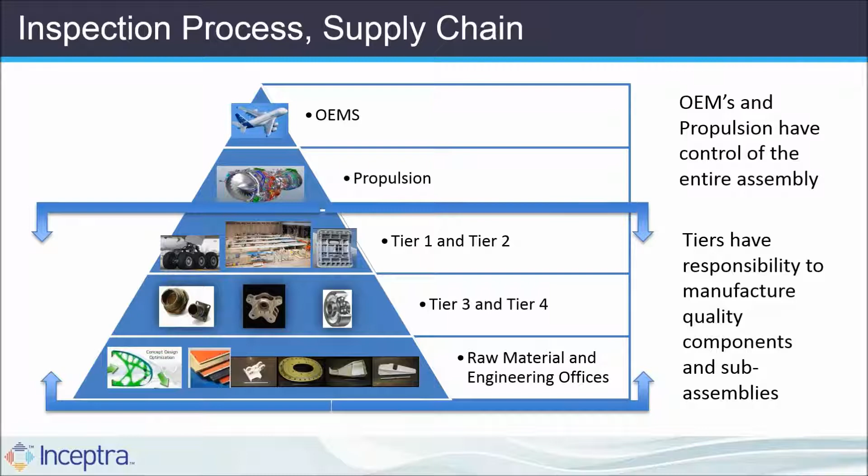And so when they have control over the entire assembly, they want their suppliers to create parts to certain specifications. The tier 1, 2, and down, all the way to the raw material supplier, have the responsibility of understanding those requirements and meeting them and producing quality parts for the OEM or for their customer. So in order to facilitate that type of communication that goes back and forth about the specifications and the demands of the part, we put in certain standards that go along in this environment.

So we have aerospace standards such as AS9102 for first article inspections, or the production part approval process for the automotive industry. So they both kind of speak the same language, and really it is that the OEMs, and propulsion is in there, communicate the requirements down to the supply chain. The supply chain consumes that information and then has the responsibility of producing quality parts. And the other interesting fact is at the run rate specified.

The reason that I add that critical component is that if we had all the time in the world, we could absolutely make a quality part every single time. It's making it at the production rate that's also specified. So there's a time component that's associated to that.

So how is this information recorded? A lot of times we have inspection plans. So if you're making a lot of 1,000 components, maybe you have to pull off every 5th one or 10th one or 20th one and go through a sub-inspection process on that particular run. Or in proving that you can meet the quality demands that have been specified, often you have to do a first article inspection report. Also, we have to have the process documented.

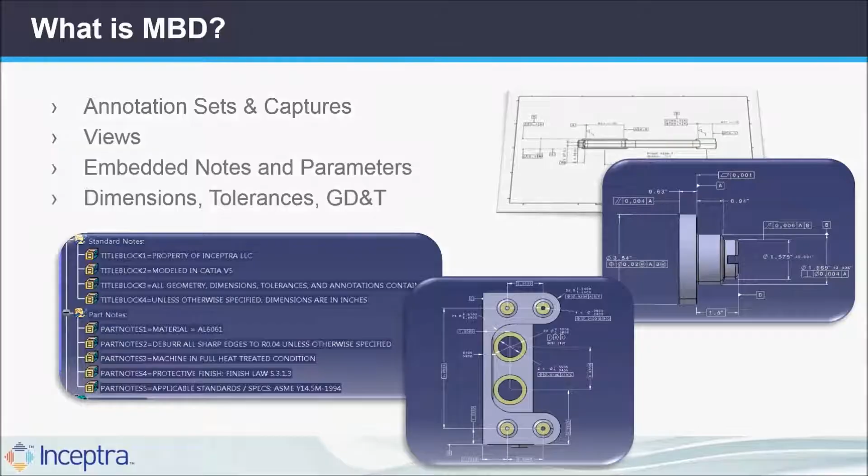So dimensions, geometric tolerancing, the datums that we have, and then also process specifications are also included either in an actual note on the 3D or in the specification tree itself. So that presents some benefits and challenges of the model-based definition approach, and that is, one model will contain all the information that you need for design, manufacturing, and inspection.

It eliminates the need for 2D documentation, and it incorporates a wider span of people, not just designers and engineers. The challenge with that approach is that, of course, we still need some 2D documentation. So there's MOT sheets or manufacturing documents that specify how we need to make the part, as well as first article inspection reports that are basically 2D based.

So to go from that 3D to that 2D, it's a manual process, and it's not really creating new information, it's just filtering from 3D down to 2D, and therefore it's not very much of a value add for most of our customers. They would like to have that information automatically extracted from the 3D. Further, this is time consuming and prone to human error. So if you're doing this day after day, you're ballooning, you're extracting information from the 3D, copy and paste and put it into a report, or if you have to type something in, a lot of times that's prone to mistakes.

So further to challenge this process of model-based definition, from the OEM perspective, it's very hard for them to be 100% compliant with the standards that are there. So just like in 2D, when you create a drawing and you don't have witness lines go over the drawing, or you don't dimension a particular feature in multiple views, we have the same type of standards that exist inside of 3D. And it's very hard for them to often have strict adherence to those standards.

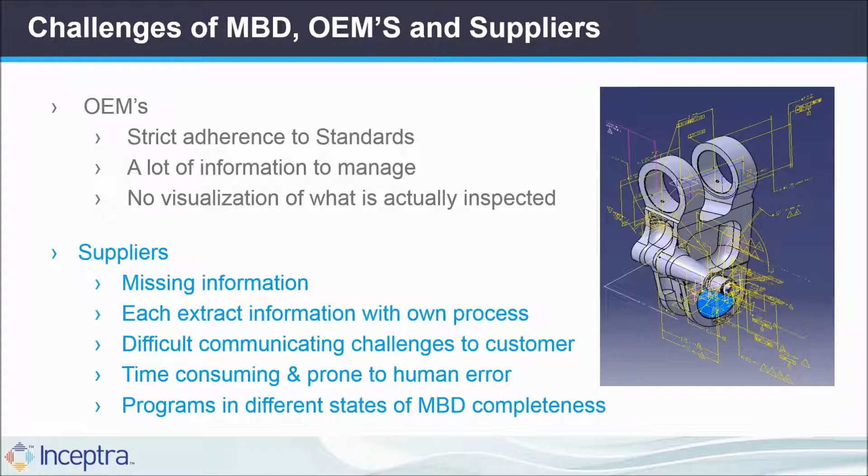And the reality is, the final comment there is that programs are in different states of MBD completeness. So sometimes you'll get just the model and the notes, the specifications are in a PDF file. They're separate from the 3D. We've run into circumstances like that. So not every program is completely embedded in the 3D model. So we've got some challenges that exist there.

Okay, so this digital continuity inspection really refers to the fact that when we start with the CATIA model with this model-based definition information in it, we can run it through our process, extract out that information, and accelerate this overall process. So there's different aspects and components to this that we'll get into deeper as we go through the presentation, but the red area here is something that's called Q-Checker, and what that does is it allows us to run predefined checks on the model to make sure that it's actually adhering to standards.

Some things we can actually fix, and some things we can just get warnings or indications where there may be potential issues with the model. So that's an optional phase, but it does scrub the data and let us know where we may have some of our challenge points before we get to the next phase, which is the Inceptra tool.

So this is the model-based definition accelerator. It creates a first article inspection report by extracting the information from the CATIA model and producing several deliverables. So one of those deliverables, now into the purple section, is the AS9102 in an Excel format. The other thing that we produce simultaneously is an XML file, and then we also create a ballooned CATIA model. So these are our downstream deliverables.

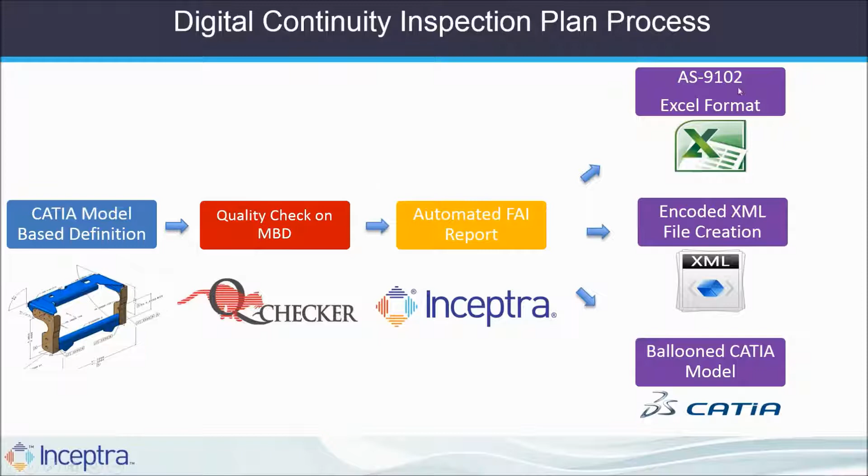But now we can actually populate that to some downstream applications such as NetInspect. So we can populate the AS9102 at the same time to NetInspect, and then we can also use this XML file and the ballooned CATIA model to feed in our measurement system, and our current partner is Verisurf.

So what this means is that a dimension that came from the CATIA model will have a characteristic ID that will be identical in the AS9102 Excel format, it will be identical in NetInspect, and it will be identical inside of Verisurf. And that is exactly what we mean by the digital continuity as we go through this process. We're always using the same processes or the same reference as we go through this.

All right, so let me continue on, and we'll elaborate on a couple of these applications that we've been using. So we talked about Q-Checker. There's about 350 different out-of-the-box checks that you can use with Q-Checker. About 30 of them pertain to specifics with functional tolerancing and annotation.

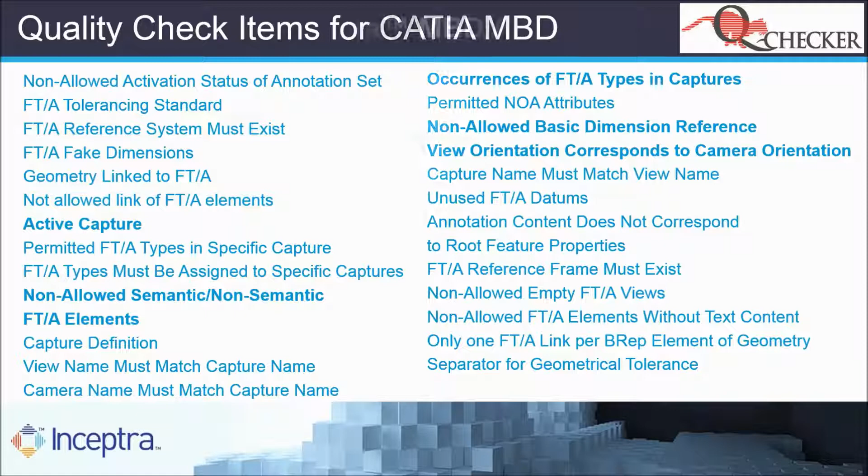The next step is to actually run the data through the Inceptra model-based definition accelerator. And this is our application that you can run on both parts and assemblies. It's configurable for different annotation methods.

So if you have multiple customers that you're working for, perhaps you're working for Bombardier or perhaps you're working for Boeing, depending on where you're at in the supply chain, they may use different approaches. And so we have a configuration file that we can utilize behind the scenes to specifically extract out their type of formatting that they've done for their models. We also can configure the reports.

We extract both captures and notes. The notes are stored in any location within the model, so it can be on an actual capture or it can be from the specification tree. We do automatic ballooning for the first article inspection, and we create that first article inspection report. And the very last line here, the XML file can be created and consumed or used to publish into NetInspect, Verisurf, as well as DELMIA.

So what this provides is a key extraction and population. So it's a consistent approach across all of our customer base to extract out this information and then populate it into the first article inspection report. There's no need for multiple attempts from each supplier, and we actually do error trapping behind the scenes. So if a dimension is actually shown in multiple captures, we're only going to balloon it once.

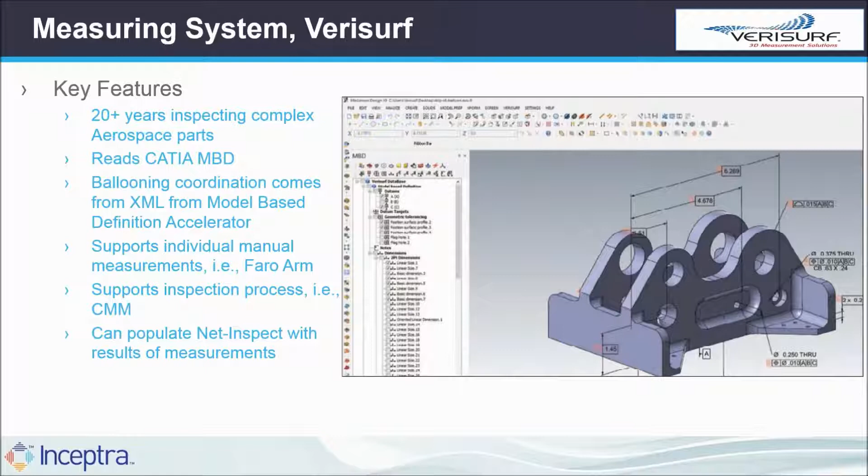So getting to the point of the webinar today, that was just background information. We do have MBDA 4.0. This is our enhancement list. In the first article inspection report, we've actually touched Form 1, 2, and 3. On Form 1, there was a request for doing partials. In the past, we've run through the entire model, and it was an automated or accelerated process to extract everything out. We've enabled a partial mode. So if a dimension has changed, if a tolerance has changed, and you only need a partial, you now have the ability to do so.

In Form 2, there's been a request to extract out part notes and parse them against known keywords. Oftentimes we'll see "per ASME standards," for example. That would be an indication for us that it should actually be parsed and put on Form 2. And on Form 3, we've added conditional formatting.

The other two highlights here are that when we publish to NetInspect, we're also uploading attached files. What that means is we are producing the 3D XML of the balloon model, as well as a JPEG of each one of the views. We'll show that off. And then for Verisurf, we have the ability to create this XML file along with the balloon model, send that off to Verisurf, they do the inspection, and then we get the results back. We can color code the results and actually publish those results to NetInspect.

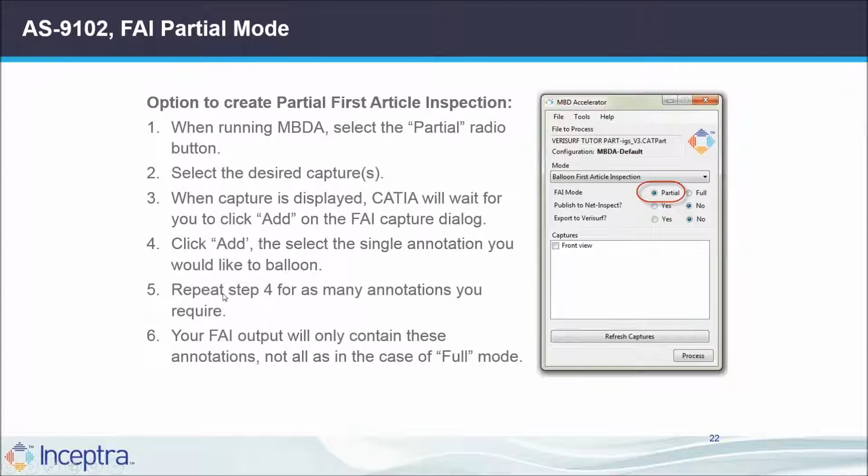So that was an overview. Here's a little bit more detail on each one of those areas. There is the partial FAI mode that's available in Model-Based Definition Accelerator now. On Form 2, we have the option to specify the specifications that we'd like to parse and put on our first article inspection report. The report that we create on Form 3 actually has conditional formatting, so it will let you know when you're within tolerance, when you're marginal, and when you're out of tolerance on the measurements that we've provided.

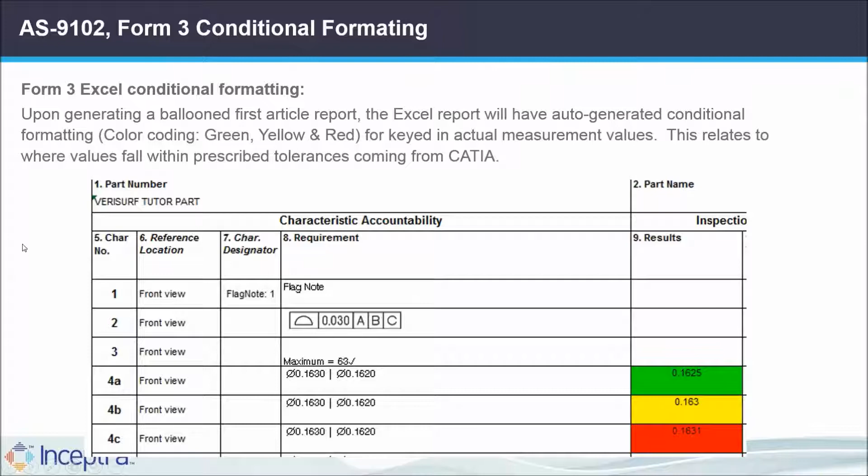For NetInspect, the automatic publication now shows up on Form 1, where we can show the different JPEGs of the views that correspond to Form 3, and we also put the 3D XML up to NetInspect. You can view this in a free 3D XML player on any desktop. It's a free player that allows you to download this 3D XML, and all of the views that we've ballooned actually come over. We'll demonstrate that as well.

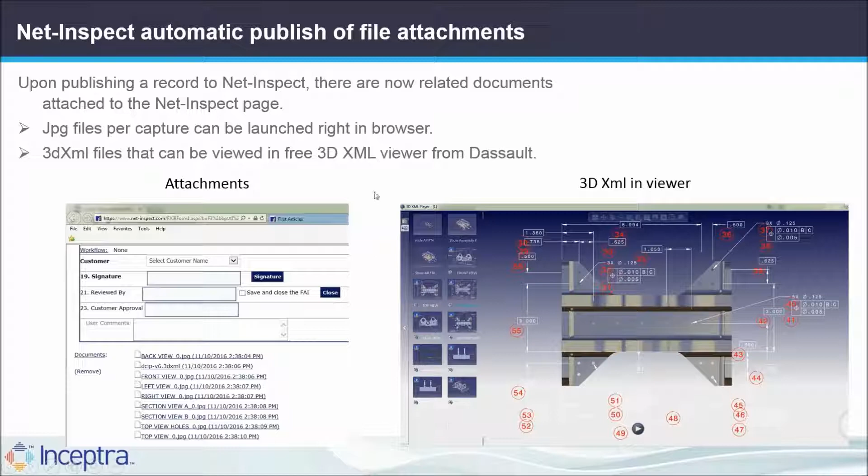And finally, before we get to the actual demonstration, the Verisurf import of their results will verify that it matches the input that we've exported out to Verisurf, so that no one has tampered with any of the data or loosened up any tolerances or anything like that. We do a checksum on the data, and then we can color code the dimensions to let you know which ones are out of spec and which ones are in.

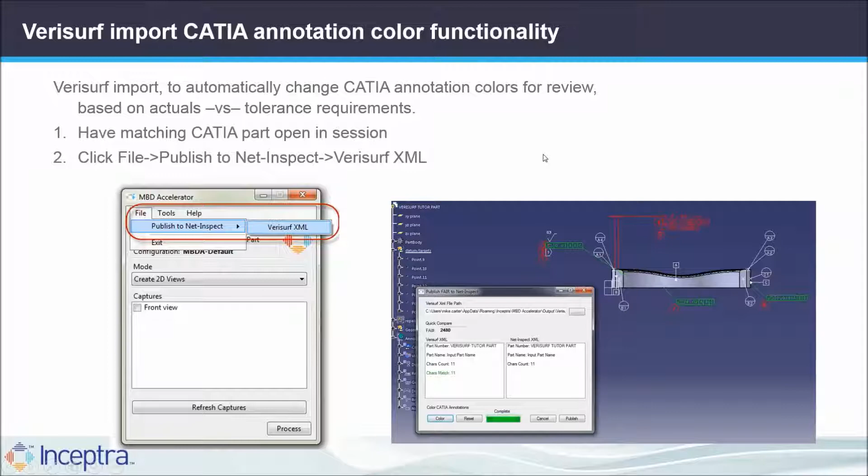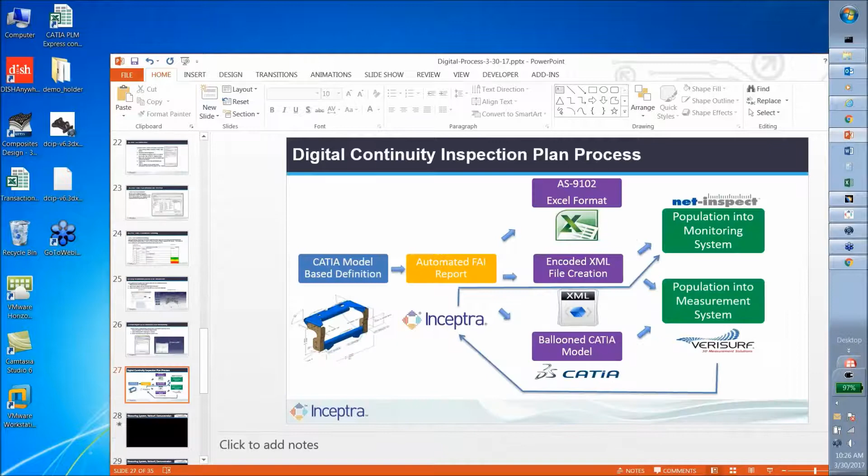All right, so with that, let me get into the demonstration and give a brief overview of some of the things that we've been talking about. So as we take a look at the part, I'm now in CATIA. We've received a part that we need to manufacture. One of the items that we talked about is the adherence to standards. We're checking the model before we ever start on this process. Garbage in equals garbage out, so let's take a look at the model and run it through Q-Checker.

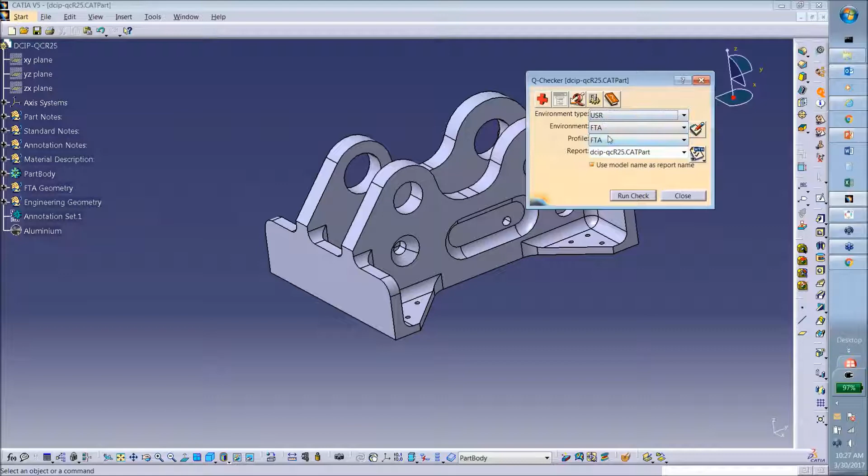Q-Checker is a commercial application that's available. They have different profiles. We've configured one that specifically checks functional tolerancing and annotation items. And what that means is as I run that check, it starts to give me feedback upon all of the checks that we've enabled and whether they've passed, whether they're marginal, or whether they're a critical item. So one of the things that you'll often see is that first off, we have an annotation set on the model and it's not even turned on.

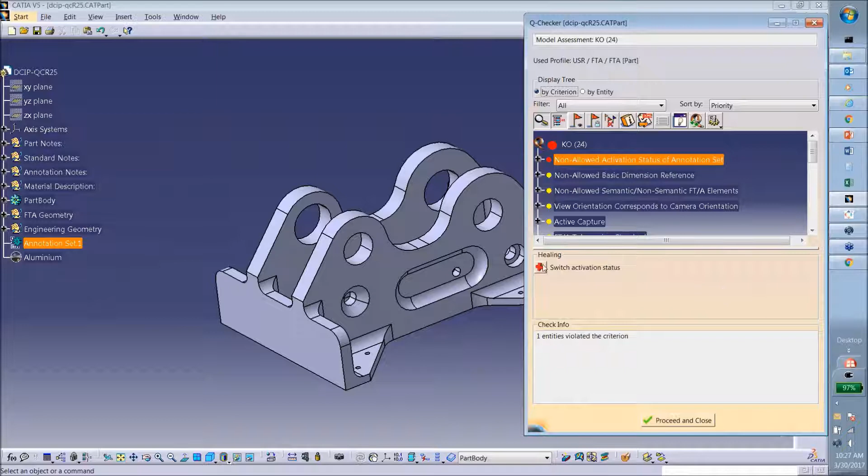So if you're using a third-party viewer, where this is critical is the fact that the third-party viewer doesn't know how to turn on the annotation set and will not even realize that there's any annotation on the model whatsoever. Our application actually automatically turns this on, but it's just a good demonstration of capability. So in some cases, we have the ability to heal that. So as soon as I select on it, now we've actually corrected that critical problem. We've actually turned on the annotation set through QChecker.

We've got some other items that now we realize in the capture environment that the capture is actually active. And what that means is that if we go through a ballooning process, any new balloons that we add and there's an active capture, every time we go to display that capture, it's going to display those balloons. So what you might want to do is actually deactivate that capture, and we've solved that particular item.

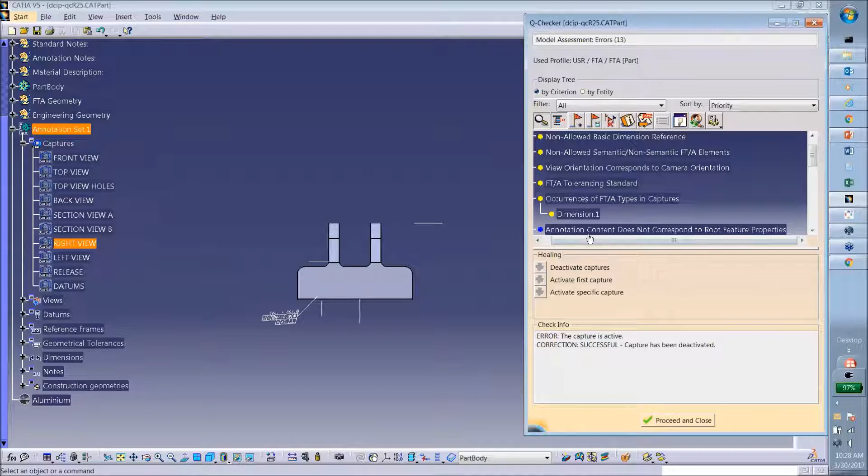A couple other items, occurrences of FTA types in captures. And what that means is that a particular dimension is actually being shown in multiple captures. So it's in the top view, section view A, datums, and section view B. So this is against the standards. So if I take a look at the captures, you can see that it's actually in 4 of approximately 9 or 10 of these captures.

We're supposed to display the dimension only in one capture, and that's kind of like on a 2D document, you display the dimension only in one view. So on this, you'll notice that there is no healing. We don't know which one you would like to show this for, so you're going to have to manually go through and determine which one that is, but it does give us a little bit of a warning on that.

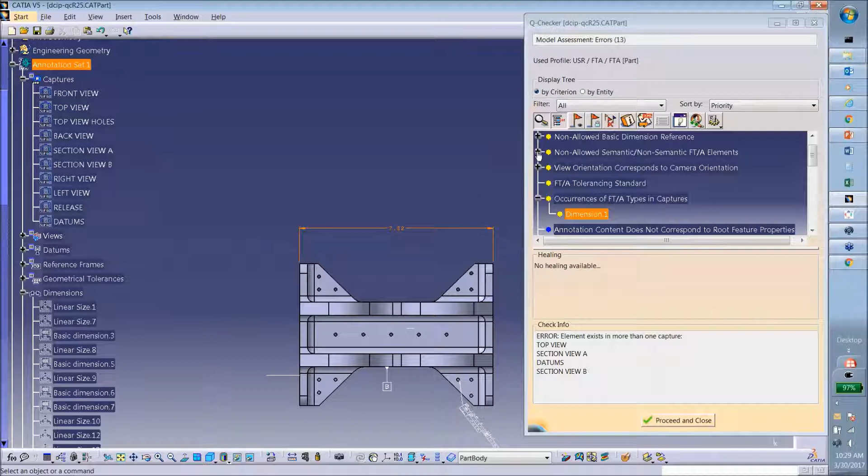The last one to talk about is semantic and non-semantic tolerancing. It's realized that one of these tolerances is non-semantic, and really what that means is that there potentially is no issue with it, but there is no guarantee that this is adhering to standards. So it's just some note that somebody created on the model, and that means that it's non-semantic.

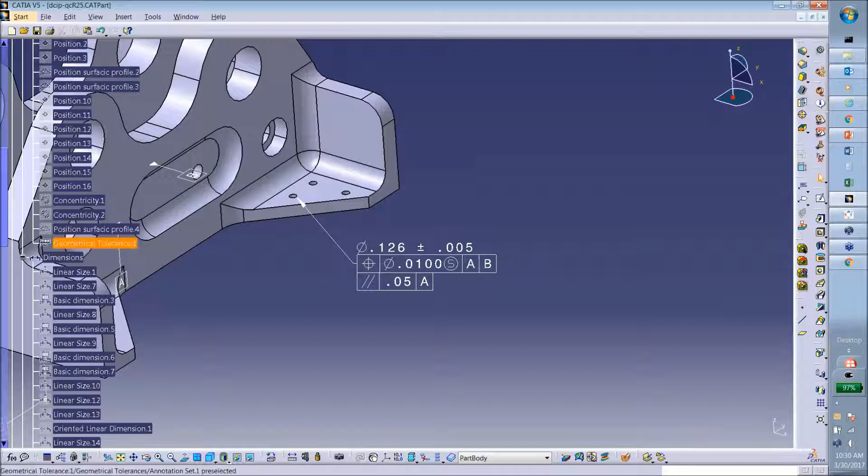And what that specifically can mean is that we've got a perpendicularity condition that's on here, and I can simply just go, what's opposite of perpendicularity? Parallel, and I could set that to it, and no bells, no whistles, no warnings went off, and that's because this is non-semantic. If this was a semantic tolerance, obviously we would know that this hole is actually perpendicular to datum reference A, and that is the criteria that it would only allow us to put on there.

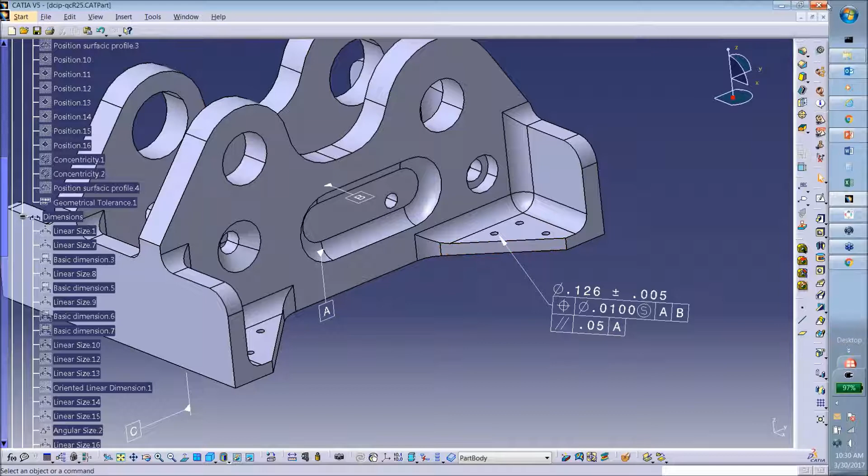So just again, some warnings that if you run into non-semantic tolerancing, it may not actually be formatted correctly, or it may actually be gibberish that got put on the model by mistake. Okay, so let's start going through a model and processing it.

Now we've scrubbed it, we've got our issues fixed up, we've put the dimensions on the right captures, we've got a clean model, and we're going to process that now. So with Model-Based Definition Accelerator, what you'll notice is that this is 4.0, so let me start in that area, that this is version 4.

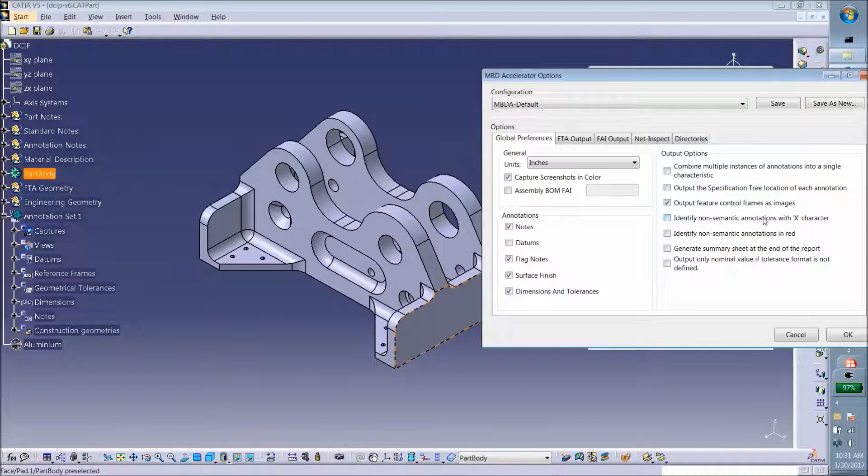And we've got a couple options that run in the background. So you can configure these different options to match the supplier that you're receiving data from. It highlights what we're going to annotate. When we run into non-semantics, do we actually want to put an X on there? Do we want to balloon datums, etc.? Are we working in inches or millimeters? And then it's really just kind of dictating what the pick and place process looks like.

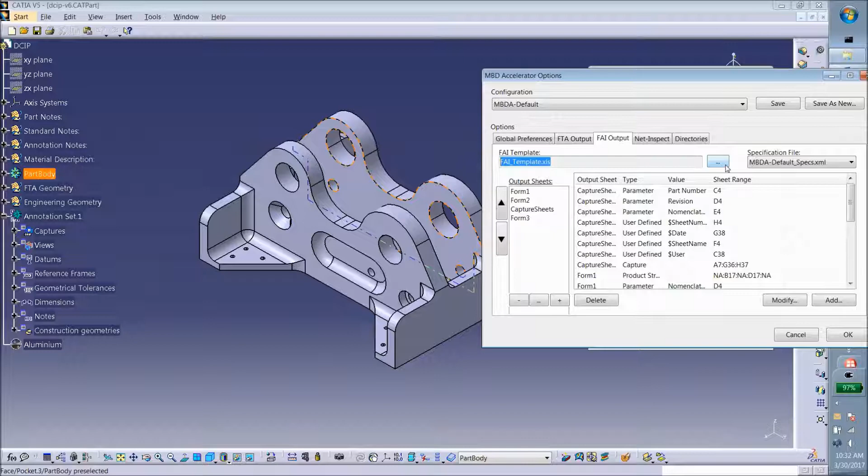So on capture sheet number 1, in cell number C4, that we're going to populate into this template that we provide, we're going to put the value of the part number from this model into C4. So it starts to dictate what we're extracting and where we're actually putting it. What you will notice is that in 4.0 we now have a specification file that's here, and this specification file contains the keywords that may exist in the model that we want to put on form 2.

Further on here, because we are going to NetInspect in the end, we have the criteria for our user login that we're going to use for NetInspect also recorded. So we've configured the options that we'd like Model-Based Definition Accelerator to use. The configuration file is denoted here. The model that we're going to run it on is the same model that's active in the CATIA session. We've got a couple different modes that we can actually enable.

So we can simply just create 2D views. Sometimes people just want to extract out the information from the model and create an Excel file, maybe for quoting. You can certainly do that 2D view. Or we can go one step further where we create the 2D information into the template that we've specified and balloon it. So I'll also tick mark that I want to publish this to NetInspect, and I'd also like to create the XML file for Verisurf.

The captures that are now next in the list are actually the captures that correspond directly to the model. So we have those listed. I can right-click and select all. I can deselect individual ones. So release is just a blank view. You can include it or not include it. It would be fine. If there's nothing to balloon, I tend to leave that off. And then we'll start the process of the actual ballooning.

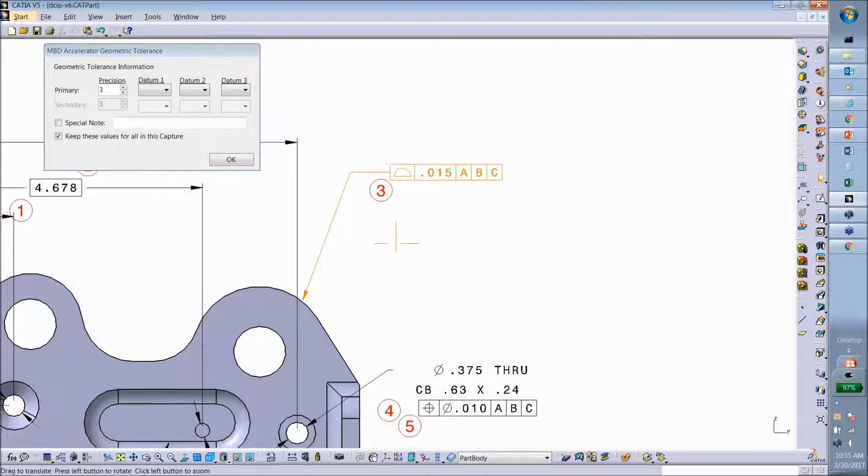When I go to next capture, it's also going to verify, because people use various different environment variables and various different configuration files, the level of detail that we have in here may actually change, so to what precision is actually displayed. So I can set the precision inside of here, and then if I look around the model, I can see that they're all to the third decimal place. So I'm going to say, don't go and ask me about each one. We're going to keep it all the same for this particular capture. So we continue through this cycle.

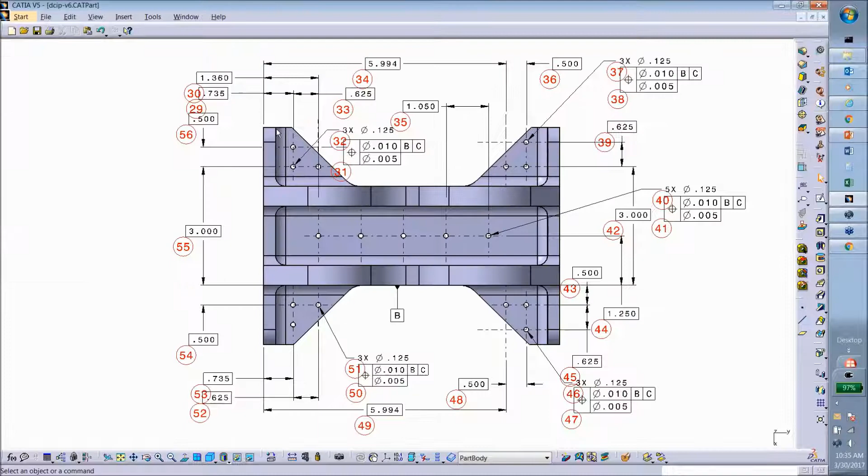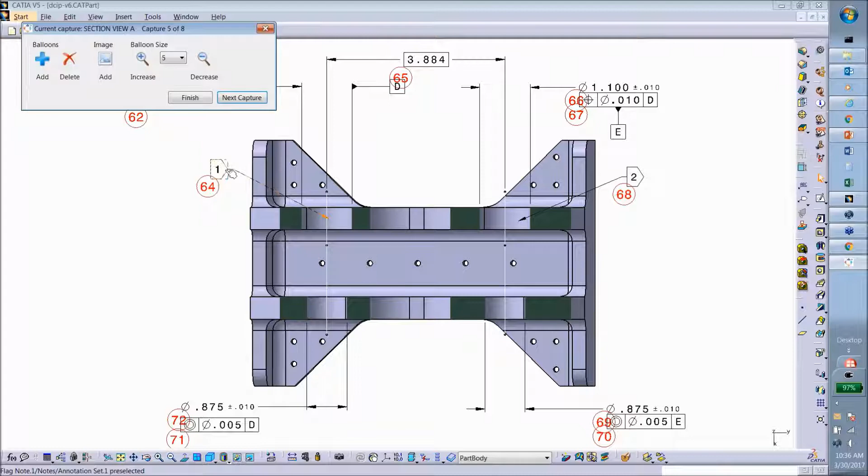And what I usually ask our customers is, think about going through 80 or so of these dimensions and recording all of them so that they look appropriate and putting them into a report. How long would that take as a comparison? The other thing to point out is that 64 and 68 are actually referring to flag notes. So we'll show you how that is treated inside of the report. A couple more captures in here.

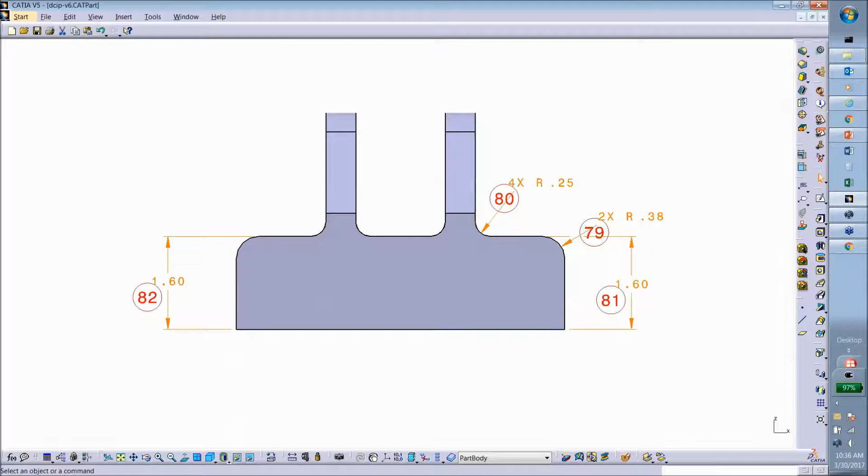I believe this is the last one. So we did about 82 balloons. We captured 82 unique items. Watch my Excel icon over here on the right-hand side. So we're going through the process right now of actually gathering all that information, creating the Excel report, and at the same time, we are connecting live to the NetInspect site and publishing that information.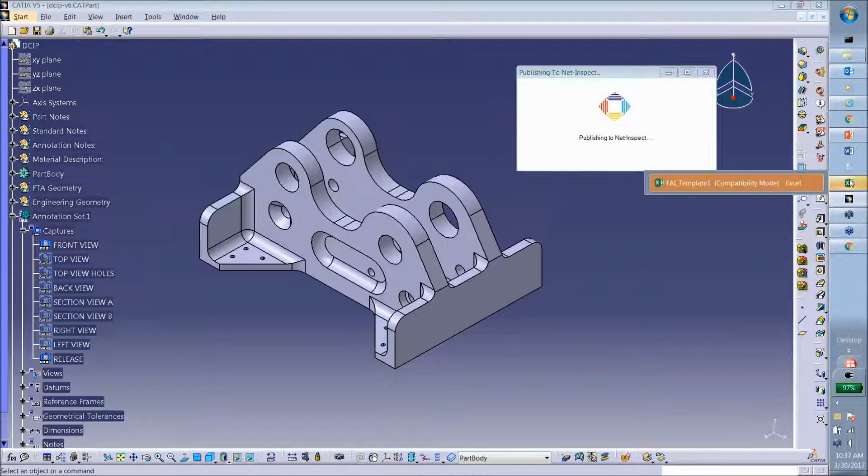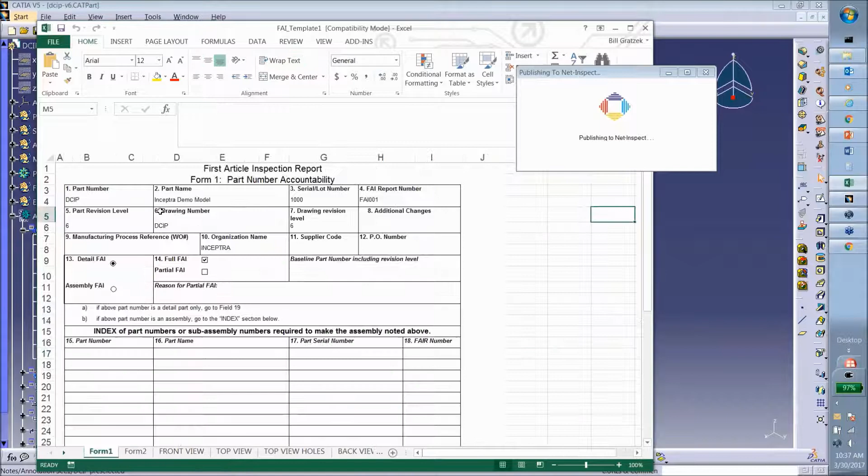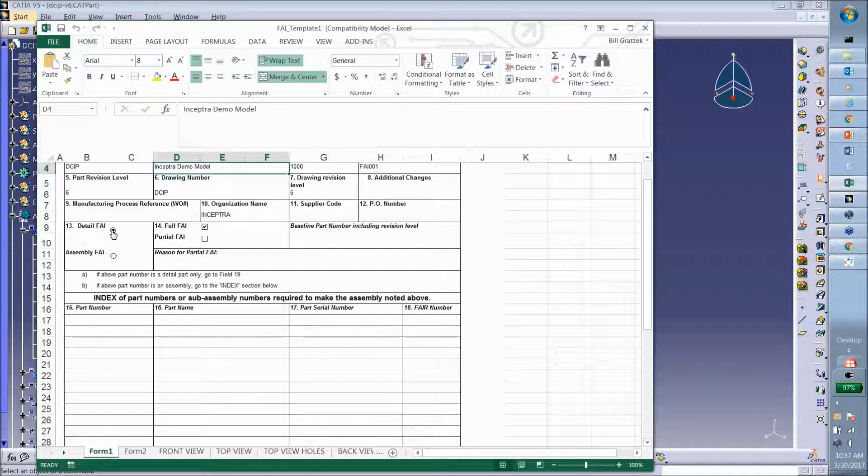So all that information that we've configured has been put into this report. If we had an assembly, this would be ticked off as assembly first article inspection, and we would fill out columns 15 through 18 with the bill of material information of all the components that are in the actual assembly.

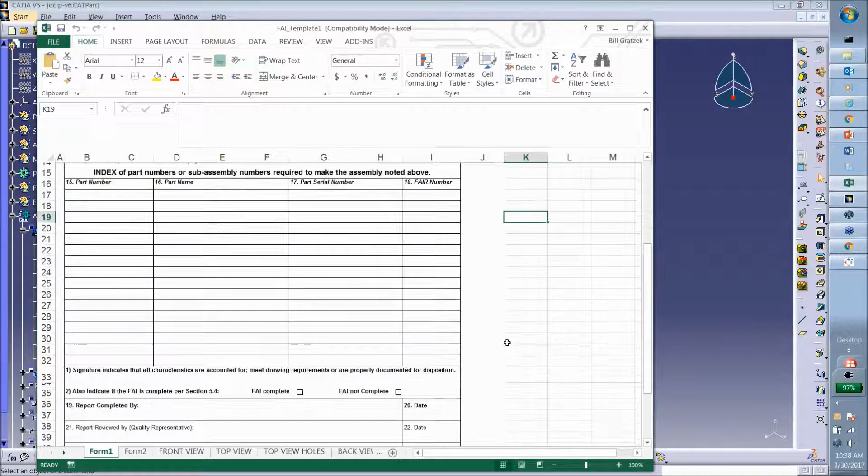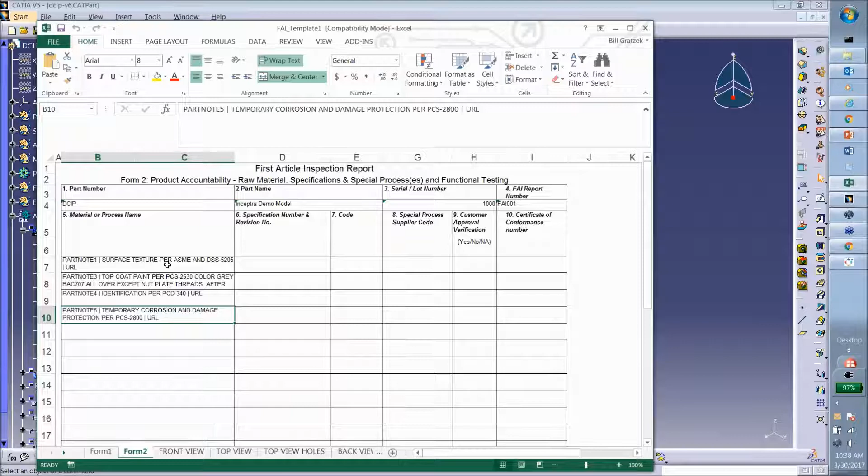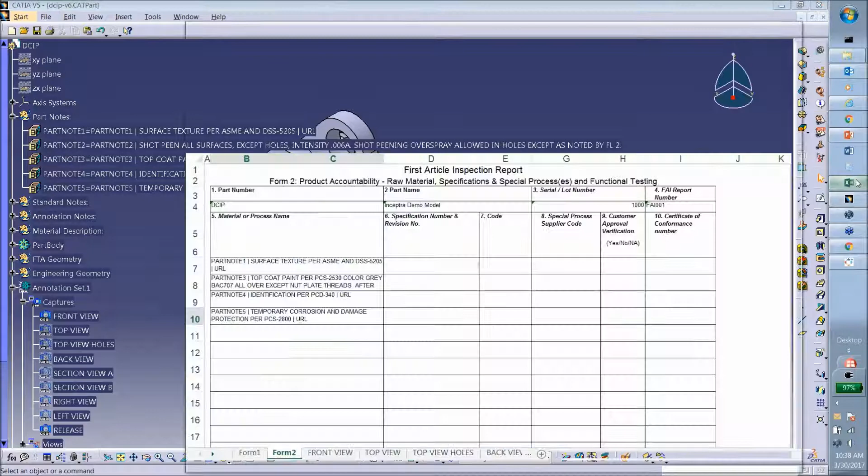So if I go to Form 2, now you'll notice that there is a change. What we've done is we've identified any note that should be populated in Form 2 based off of our specification file. So specifically what that means is that if I take a look at part notes here, there were 5 part notes, but only 4 of the 5 actually called out a specific specification. So per ASME, per PCS, per PCD, per PCS.

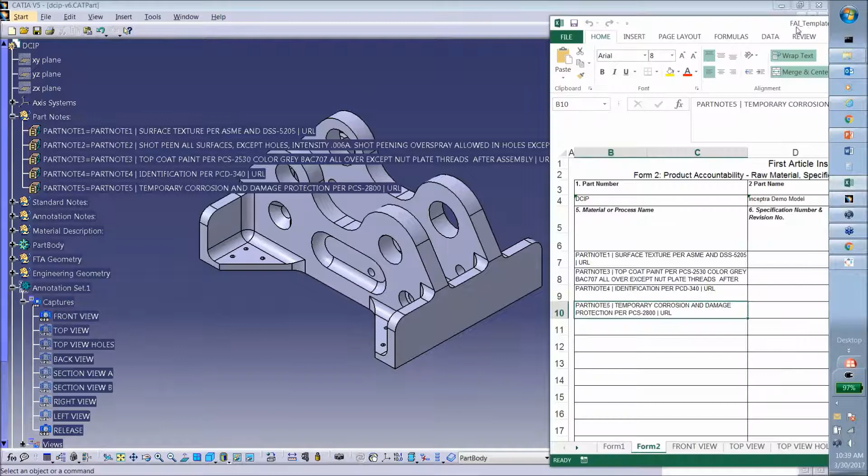So these are the ones, 1, 3, 4, and 5, that actually have been recognized by our specification file, and they get populated. Part note number 2 does not have any of that terminology, but it does talk about the flag note 2 that's on here, but it doesn't belong on Form 2. So you can choose to employ this or not.

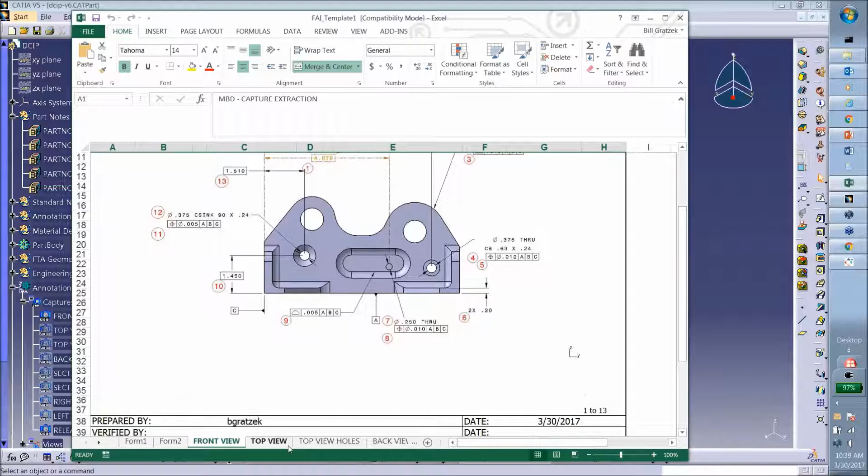And then as we go further through the first article inspection report, we start getting to the Form 3 supporting items. So here's the ballooning capabilities. You'll notice that it denotes that this particular view contains 1 through 13, 14 through 28. And as we move through the particular views, we get all of them all the way up until the Form 3 formatting. So this dictates which reference location it came from, and I will continue on with going through these.

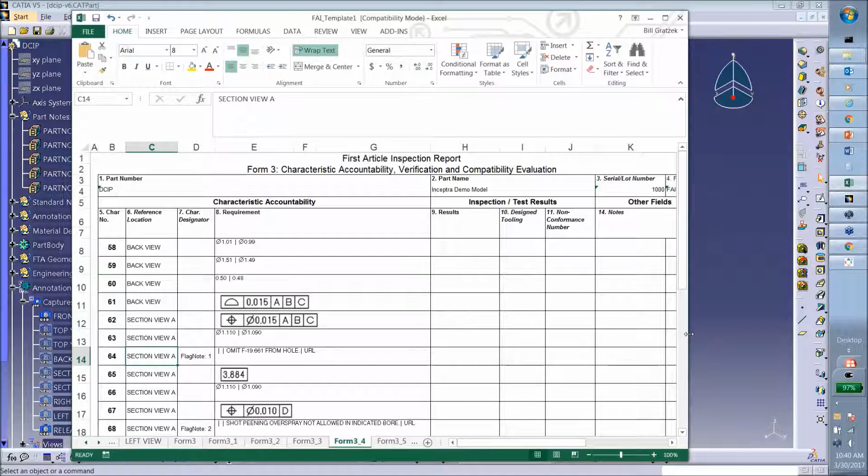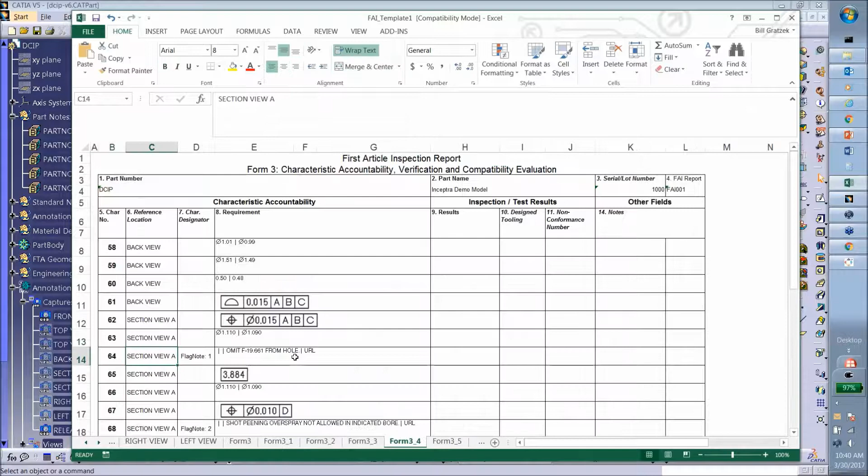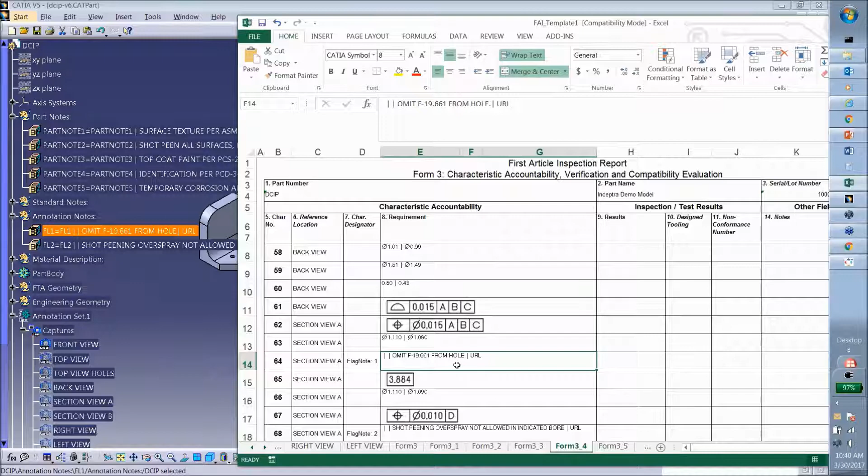So all of that's been captured, and the one thing that I wanted to point out is that on section view AA, if I bring this back just a little bit, section view AA, that was the one with the flag note. And we take a look at, well, where did it actually get this value from, because it only populated just a balloon on that flag note. Well, that actually synchronized up to flag note number 1, and then we extracted this information and then correlated that to the flag note number 1 value that should be populated in our first article inspection report. So that's in on the inspection.

Let's go take a look, because it did populate up to NetInspect. So I'm going to go to the actual live NetInspect site. If you're required to populate information up here, you would first log in. So everything that you do on the NetInspect site is required by username and login, so they know exactly who is in on the data. Let me see if I got that correctly. And then you'll have access to that. So if you ever populate anything in here, if you ever change anything, all of that information is tracked.

So if I take a look at my first article inspection reports that are up here, we'll see that the last one, the 2537, is the last one that I just populated on this date. And that was the one that got indicated through our notification through the model-based definition accelerator. So this is identical to the first article inspection report that we have just taken a look at inside of Excel. You'll find all the characteristics match, all of the population of the information matches, as well as, and this is new for version 4, we've actually populated the views that go along with this.

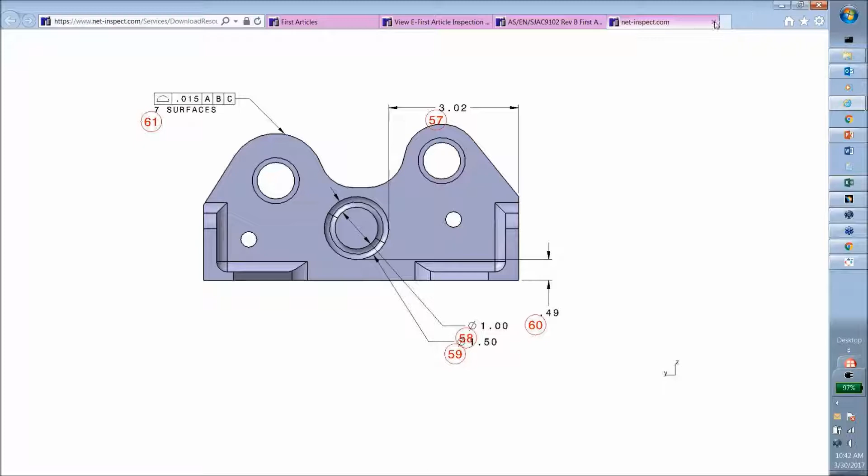So if I wanted to do the front view and see the actual balloons as I'm taking a look at this report, I certainly can reference that. The other item that we have is that we've populated the 3D XML up here.

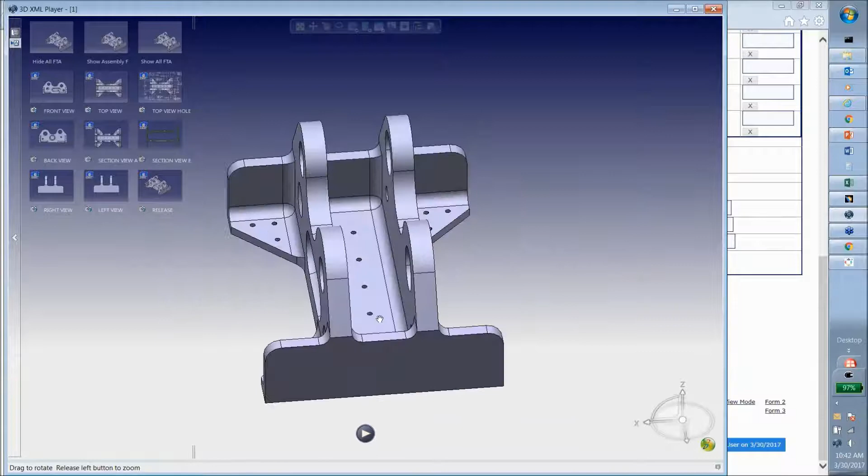So I have the ability to save that off, and when I save it off, then I can actually use a free 3D XML player from Dassault to review this information. So what's in that information? Well, it's everything that we've populated so far. So if I go to the front view, you'll notice that all the balloons along with all the dimensions are there. Top view.

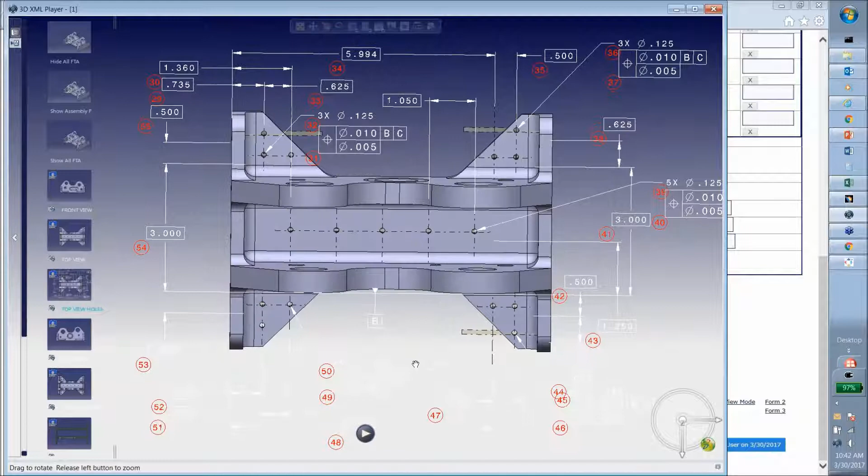So now you can look at this report, and you can also reference the 3D information at the same time. So if you're looking for a specific dimension, I think it was in the top view, you may remember that we had, well, which dimension is it for the 150? Well, the 24 is calling out this 150, the 25 is calling out the 150 that's in the middle. So there will never be any confusion for that further. Plus, you have the views to look at.

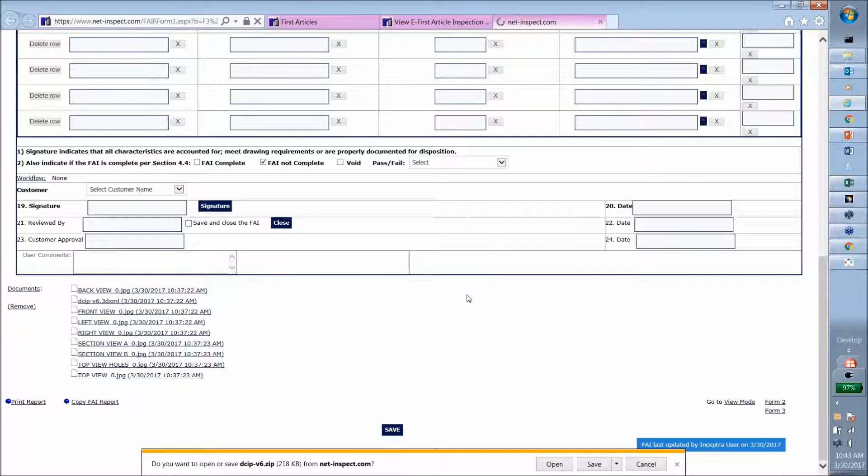Form 2 here also contains our specifications, and what NetInspect does is it actually calls out which standard, whether it's ASME or PCS, and populates column 6. So they have their own internal linkage to what we've actually populated through here, and they maintain that. And then let me go to Form 3.

And when we pull up Form 3, what you'll see is these are the exact dimensions that were called out onto Form 3. Now the interesting thing about what we've done when we populated to NetInspect is the fact that this information has had business logic formatted into it. So we've dissected this, we've created all the symbols, so whether it's a profile symbol or the actual tolerances that go along with that, and then we put the business logic down below.

So when you type in your actual results, so let's say we did 3/8 on that, that's within tolerance. If we get marginal right on the boundary of the tolerance, it shows up as yellow. And if we go below the tolerance, it actually flags it as red. So this is the business logic that we've provided when we populated to NetInspect, and then they display these results in this way.

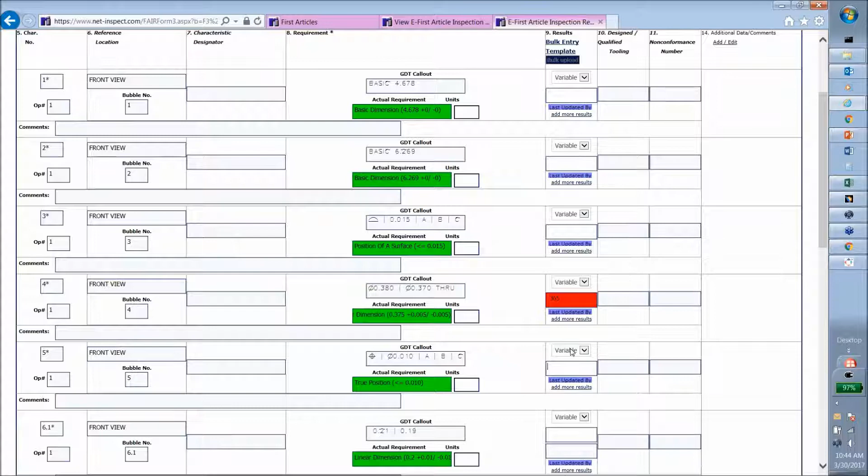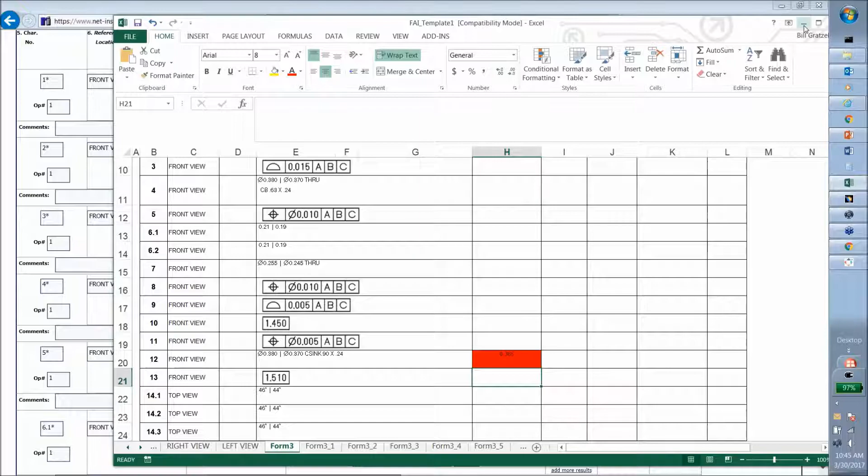So similarly, what we've done, which is also an enhancement on our particular results, if I go to that in our Form 3 on our Excel page, and maybe you're not using NetInspect, if I put in the value for those results, we actually get the same color coding that is supported by NetInspect. So if I'm marginal, it's going to show up as marginal, and if I'm out of range or out of tolerance, then it shows up as red. So we've got those color codings that go along with this.

The last part that we're going to talk about is the Verisurf integration to this. So let me do a quick video presentation. So as we've created the first article inspection report, we've populated that to NetInspect. It's waiting with the first article inspection report up there. These two have direct continuity between them, as well as the information that we've sent over to Verisurf.

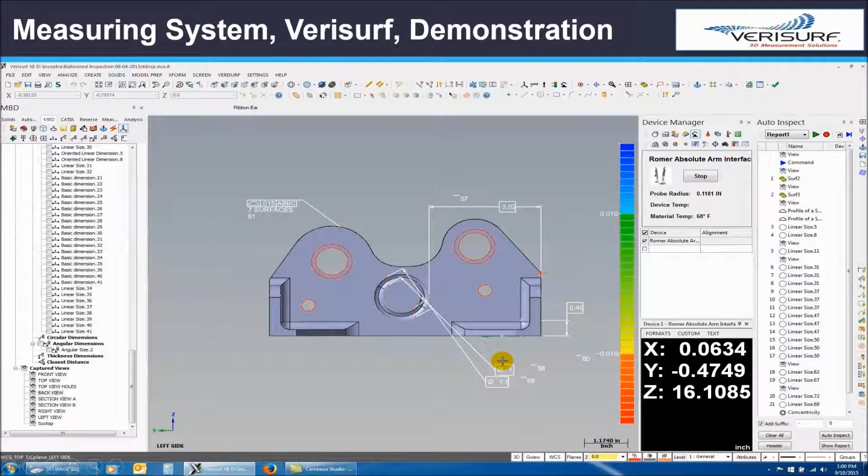So as I take a look at the Verisurf item, this is now that part inside of Verisurf. It has the dimension along with the callouts identified. So it brings in the geometry and also verifies the geometry, as well as captures all the dimensions, all of the balloon characteristics that we've put in for each of these dimensions. And what we can do from there is actually come up with the inspection plan.

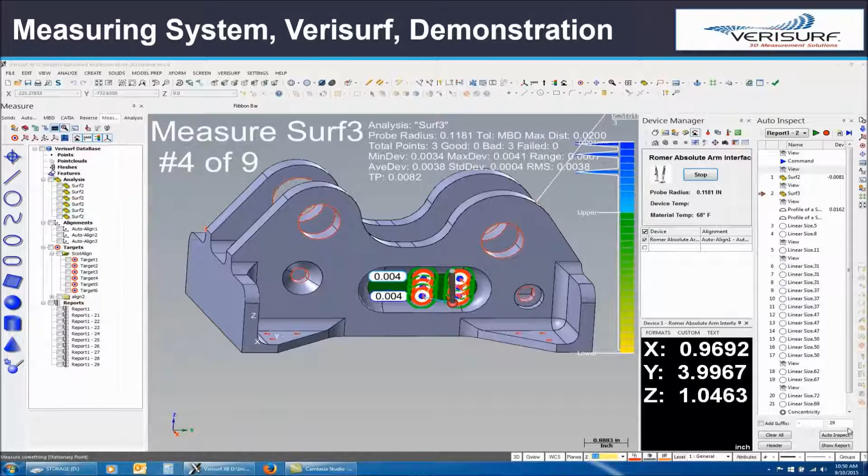So for example, there is a specific profile callout on this part, which requires us to take about 28 measurements to let us know if we've actually satisfied that profile tolerance. We've also got a surface measurement for parallelism that we need to do 9 measurements on. So it's not a correspondence of one measurement per each characteristic. There may be a number of measurements that are required in order to satisfy whether or not we're in or out of tolerance on that particular condition.

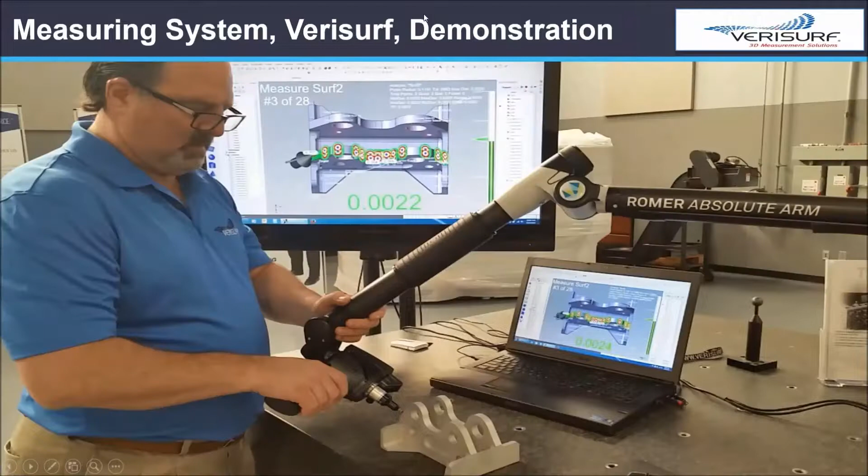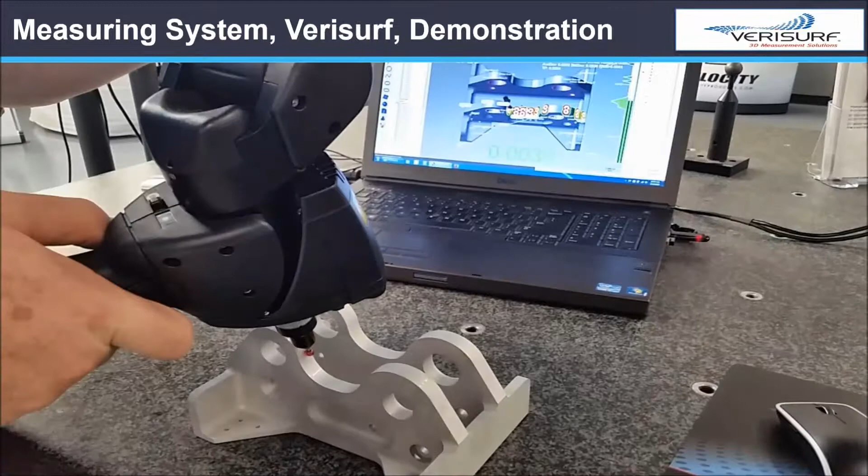And what that actually looks like is you can kind of see that the targets are displayed. You saw that prior. Now we can take the Romer arm and actually identify those points and take the measurements of those points directly with reference to the model that we've provided to Verisurf. So this is just a close-up view of what those measurements actually look like. So you put the Romer arm exactly in the target location and acquire that measurement.

And what happens now is that Verisurf will actually write out these results for us. So let's take a look at what that looks like. So while I'm in the model, let me go to something like the front view.

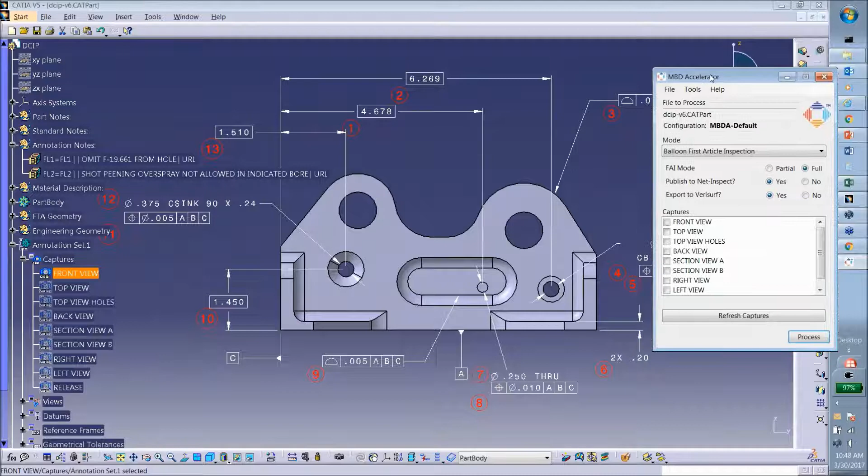Inside of our model-based definition accelerator, we can actually publish to NetInspect our VeriSurf results. So let me bring this over just to the side here. I'm going to publish to NetInspect the VeriSurf results. And so these are the results that we've just recorded, figuratively, of course. I don't have the Romer arm actually with me, but the process goes something like this.

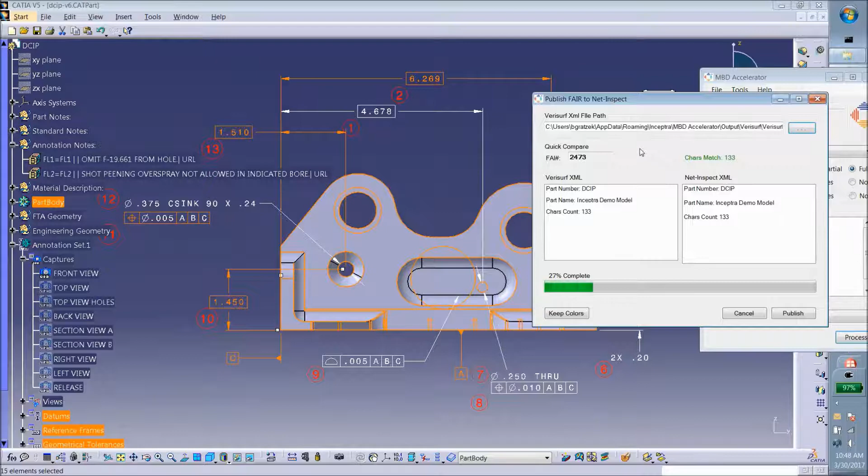So the first thing that we do when we bring those results from VeriSurf back to the model-based definition accelerator is that we identify that the characters actually match. So the number of characters that we output are the same number that we're getting back from VeriSurf. The other item that we're doing is a checksum on here to make sure that nobody's tampered with a 10,000th dimension and turned it into a 15,000th dimension because maybe one of the measurements was off and they want that to go through quality. So that is one aspect of this.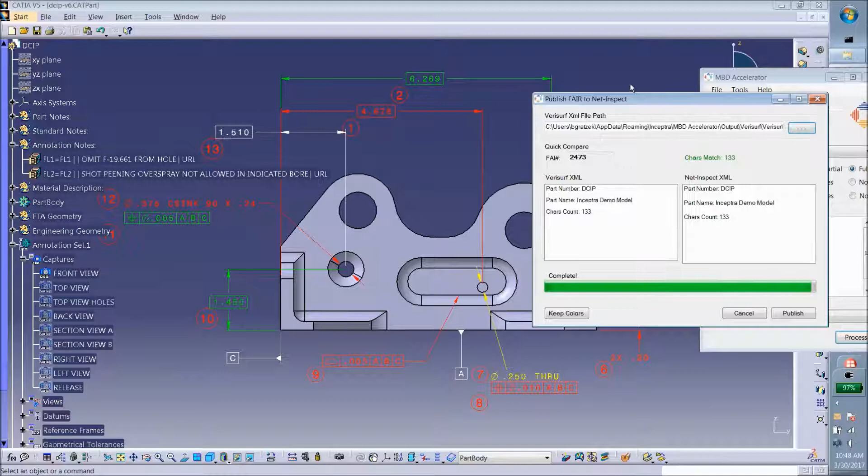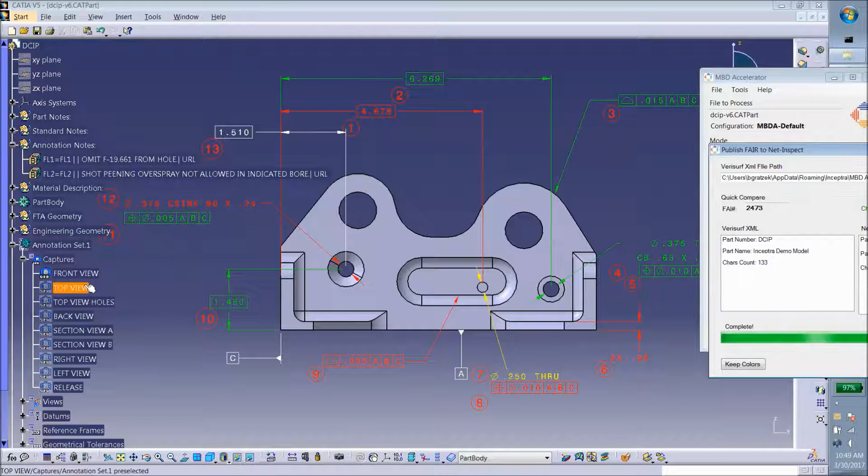The other thing that you'll notice is that we've actually color-coded the dimensional results for review on the model itself. So now you get a visual feedback on the model of which ones are out of tolerance and which ones have passed the quality conditions that have been specified in the first article. So I can display each of those captures, which ones are marginal, which ones have passed that criteria, and review this particular information. So when you're satisfied with that, you can actually publish this up.

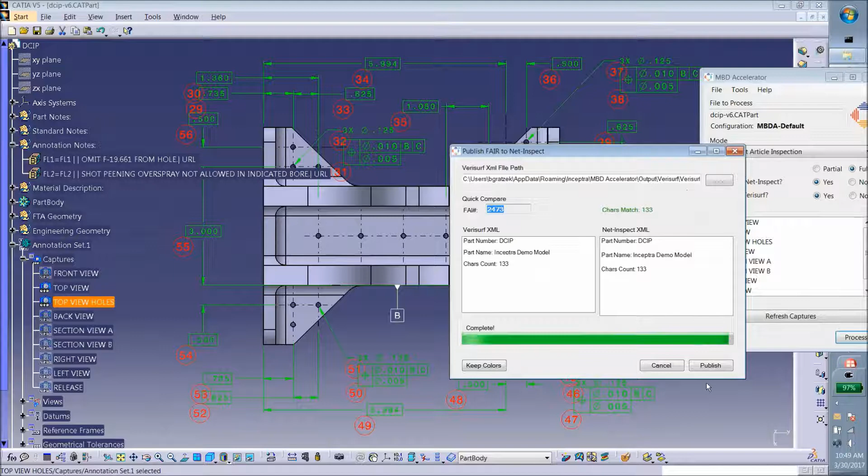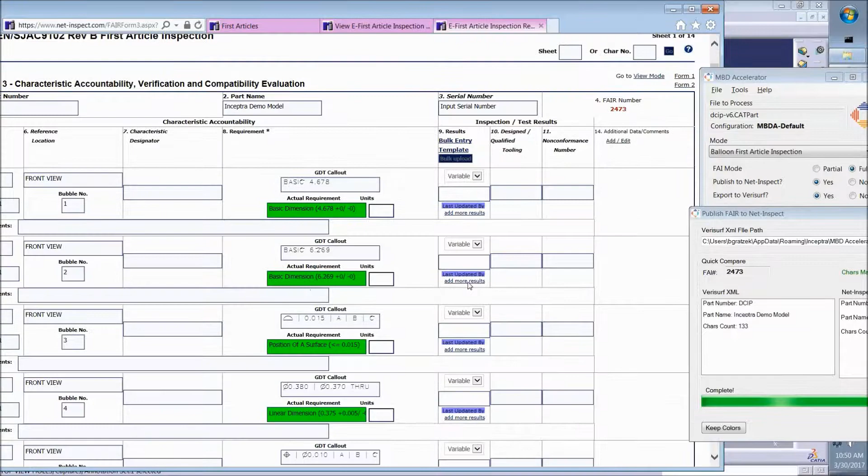So you'll notice that this one is for first article inspection number 2473. So before I go and publish that up, let's go take a look at our inspection report here. And I am going to go to 2473, which is this one. And I'm going to go to Form 3. And so on Form 3, you'll notice that all the results here are actually blank.

So what will happen is that we're going to take the actual results that we received from VeriSurf. I don't have to retype it. I simply need to publish this up, and we're taking the actual measurements that we had from VeriSurf, that we've validated agree with what we've sent out, and now we're publishing those to NetInspect to this specific 2473 first article inspection report.

So what happened here? Well, it just needs an update, so let me update this screen. And we'll take a look at the 2473, and you'll notice now that all the results have actually been written up to NetInspect, as well as color-coded through here.

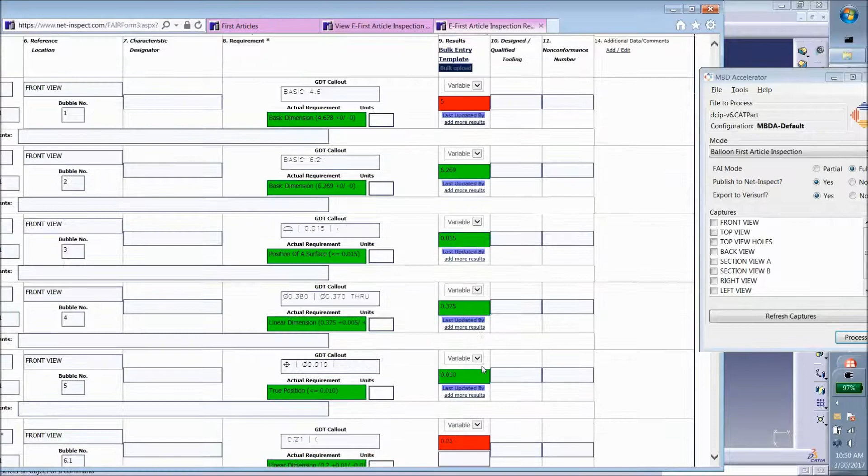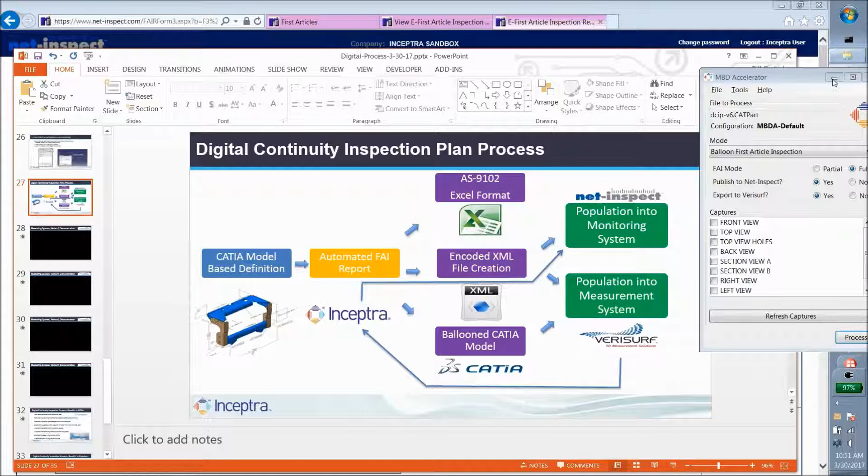Okay, so we've kind of come full circle, not only from the demonstration perspective, but also full circle through this process that we've outlined here: taking a CATIA model, going through Model-Based Definition Accelerator, creating the inspection report in Excel format, the XML file, the balloon model, populating that to NetInspect, sending it out to VeriSurf, getting the actual results, verifying that the report we sent out is the exact same report that we brought in as far as characteristics are concerned, color coding the model, and then when we're satisfied, we can actually populate that information up to NetInspect.

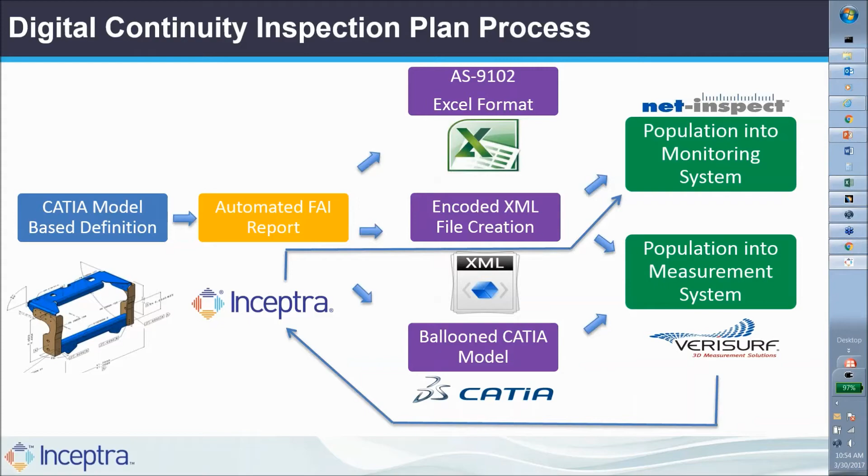And the last thing to point out is that not all of our customers are going to NetInspect, and not all of our customers are using VeriSurf. We do understand that. And these are optional add-ons to the base Model-Based Definition Accelerator application. So they are add-ons that are available to you in the 4.0 release.